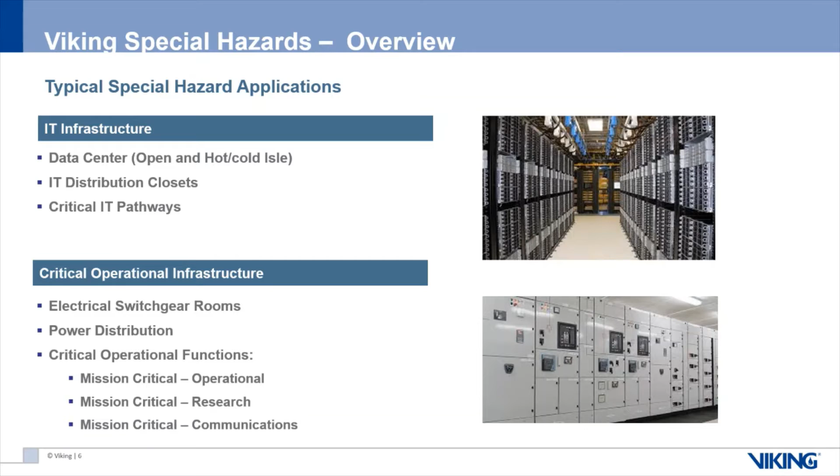So that's where the clean agents and some of the inert systems come into play. We want to put the fire out if there is an emergency, and we want to do so and maintain operation without any downtime.

The other applications when we deal with clean agent systems in particular, we're talking about rare books or archive storage, computer rooms, museums, and art galleries. If you haven't seen the Novec 3M product, it's pretty cool.

I know they do a really nice demonstration of the product and how it works. It's actually stored as a liquid inside the tank, and it gets dispelled as a gas once it discharges. But they actually show this: the demonstrator will take a piece of tissue paper and draw on it, then pour a little bit of water on it, and of course the ink runs and the paper gets dissolved. Then he'll pour a little bit of the agent on there, and nothing happens to the ink. The paper is intact, and it's just a little cold to the touch.

So that's very important when you're dealing with art galleries and museums. You don't want to destroy the rare properties or the rare materials that are inside the facility. So that's where clean agent comes into play.

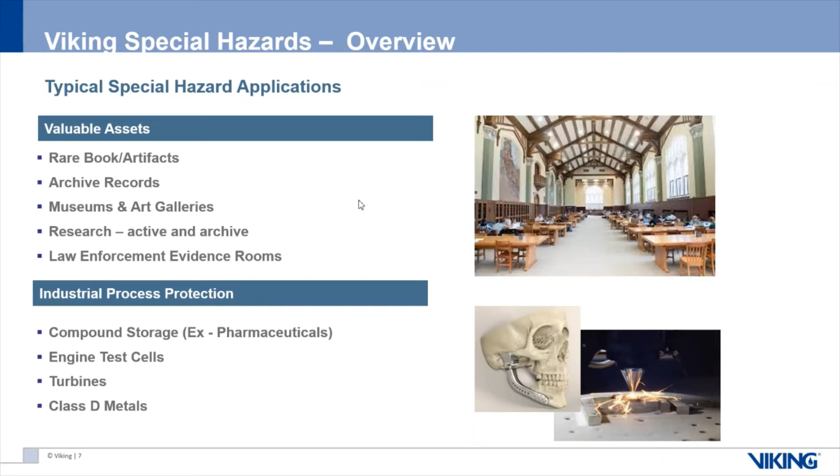We also, some of the inert systems, I talked about Class D metal fires, engine test cells, turbines. That's where some of the inert suppression systems come into play.

So I want to get into how the inert systems work. When we talk about inert clean agent systems, basically what we do is affect the oxygen level inside of the protected space or inside of the protected equipment. So we effectively reduce that oxygen level from 21% to something less than 16%. By interacting with that oxygen level, we're able to suppress the fire, and that's what puts it out.

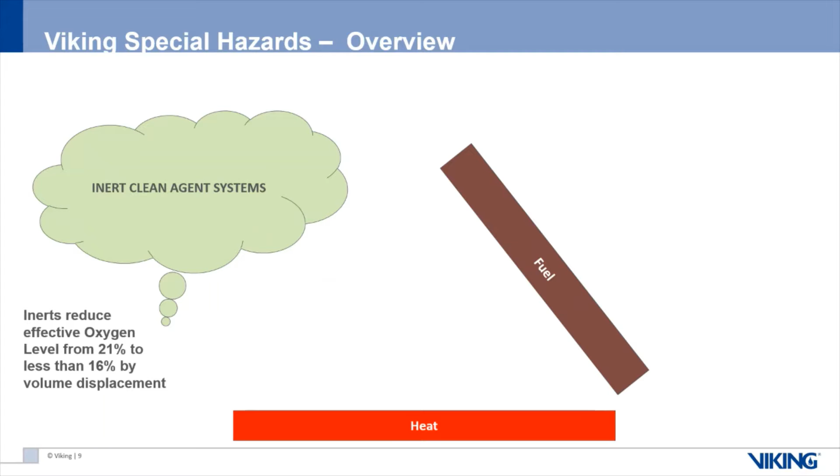Of course, the fire triangle is heat, fuel, and oxygen. In this case, when we talk about inert clean agent systems, we're affecting or interacting with the oxygen in the protected space that we're doing.

Some of those inert solutions include nitrogen, CO2, and argon. There are also some blended inert solutions. IG55, for example, is 50% argon, 50% nitrogen, also referred to as argonite. IG541 is 40% argon, 52% nitrogen, 8% CO2, also referred to as Inergen.

We sell the argon system as part of our solution to Class D metal fires, and as you'll see, it's the best agent, our best inert gas, I should say, for suppressing those types of fires.

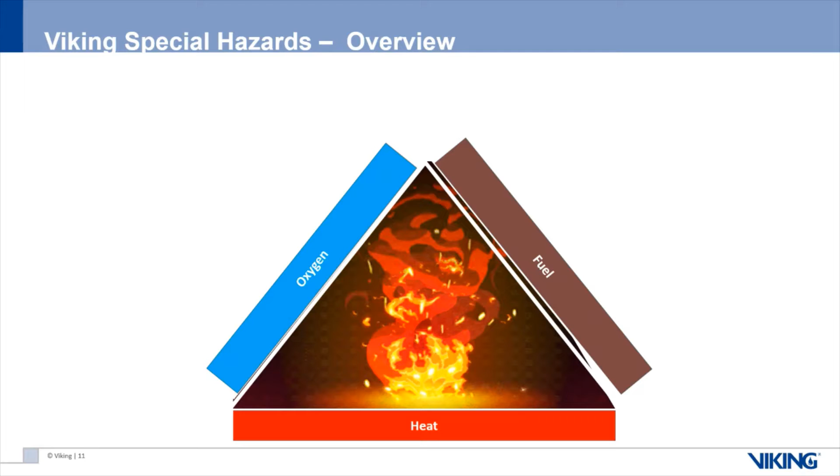So here we have our fire triangle again. If you have heat, fuel, and oxygen, of course you have fire. The synthetic clean agents, now I'm talking about the VSH 1230 or the Novec 1230 systems, or the VSH 200, FM 200 systems, those types of agents, when they're discharged, interact with the heat source of the fire triangle. They have a cooling effect, and that's how they put out the fire.

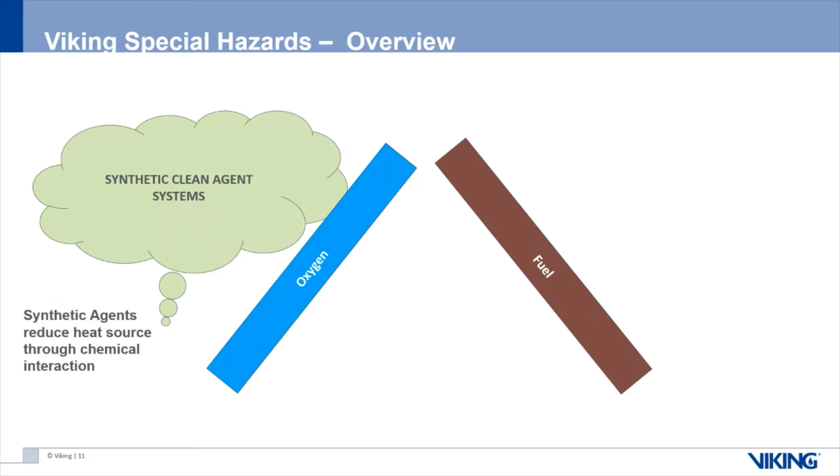So that's the difference between the two. The inert gas interacts with the oxygen, depletes the oxygen level of the space or the protected piece of equipment. The synthetic clean agent systems interact with the heat and have a cooling effect, and that's how we suppress the fire.

So when we're talking about clean agents and protecting the space, NFPA 2001 classifies the hazards. Class A, for example, deals with ordinary combustible materials such as wood, cloth, paper, rubber, and plastics. Class B is flammable liquids, and Class C is a fire that involves energized electrical equipment.

So when we're designing a data center or computer room, we're typically designing around a Class C fire, which is energized electrical equipment. For Novec, for example, our design concentration for a Class C fire would be 4.5% design concentration. That's the level we need to maintain inside that protected area in order to suppress the fire.

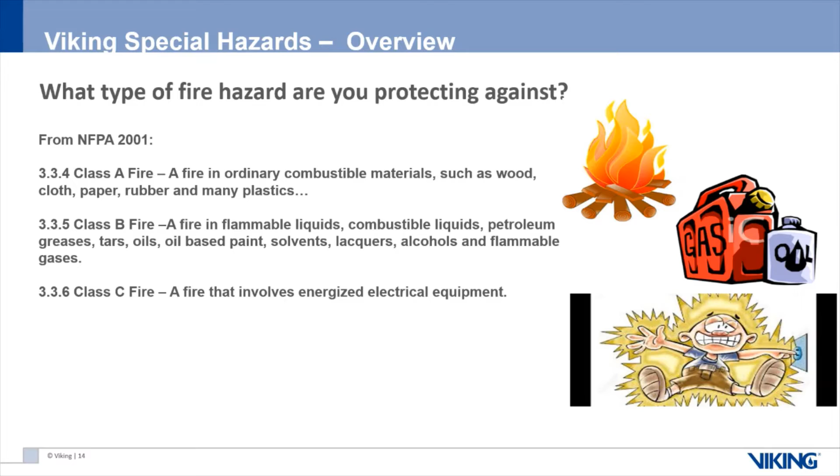For FM200 on a Class C energized fire, we're dealing with 7.3% design concentration. So when we set up a system, when we quote a system, we're doing our calculations based on those design concentrations when it comes to clean agent.

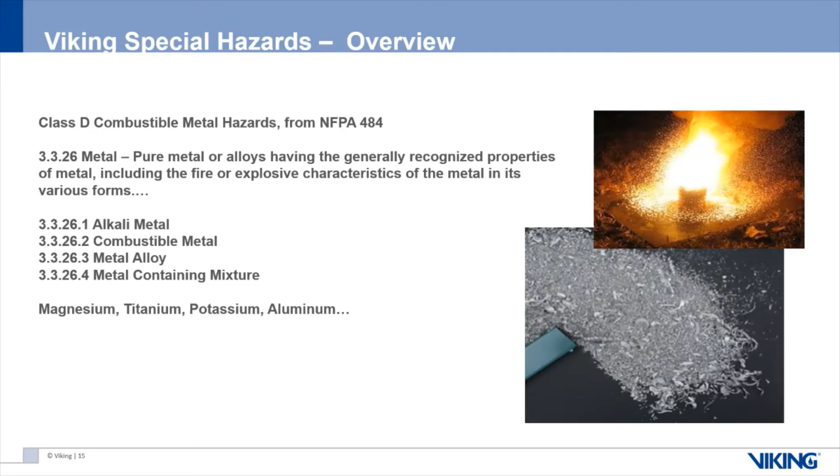Class D combustible metals is defined in NFPA 484 as pure metal or alloys having the generally recognized properties of metal, including those fire or explosive characteristics of the metal in its various forms. So here you see the different types: the alkali metals, the combustible metals, metal alloys, magnesium, titanium, potassium, and aluminum.

You do not want to put water on most Class D fires. You will have something not good happen in that case.

So we do sell a lot of argon systems. We're in the process of getting these systems approved. However, since it is the best solution for these types of combustible metal fires, we have not had any obstruction or any authority having jurisdiction not allowing us to install these argon systems in their facilities.

So when we're talking about our engineered suppression systems, here I'm talking about our clean agent systems, our VSH 1230, VSH 200. One of the advantages that Viking brings to the table is they're available in 360 PSI and 725 PSI cylinders, both for FM 200 and 3M Novec 1230.

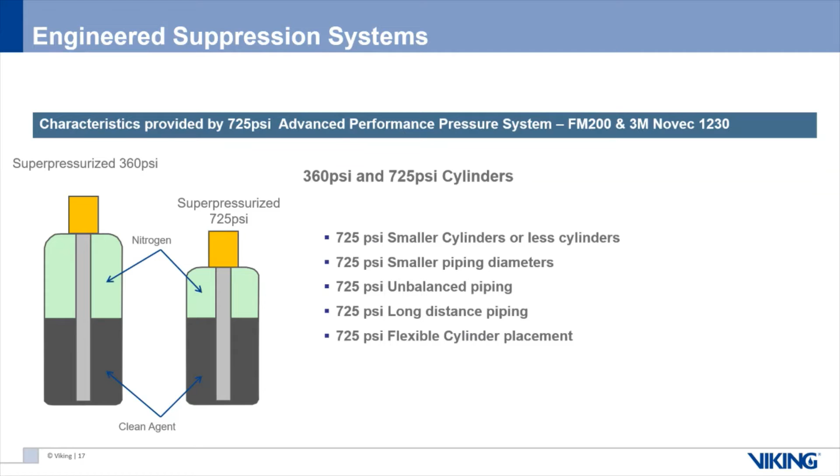So if you're interested in information on that, if you're looking to take over an existing halon system, get with Scott or get with myself, and we'll provide you some documentation that discusses that specific application and how we work with the 725 PSI cylinders.

So our typical pressure loss at our nozzle is 111 PSI, and the pressure loss at the cylinder valve is about 116 PSI. So do the math, and what you have left over to push that agent through the piping network and the tees and the fittings and whatnot. On a standard pressurized 360 PSI system, you're looking at 133 PSI versus close to 500 PSI on a high pressure 725 PSI system.

So again, that enables us to use smaller cylinders, run the piping network further, use smaller piping. And if we're replacing an existing halon system, in most cases, almost all cases, we're able to utilize the existing piping network without having to replace all that.

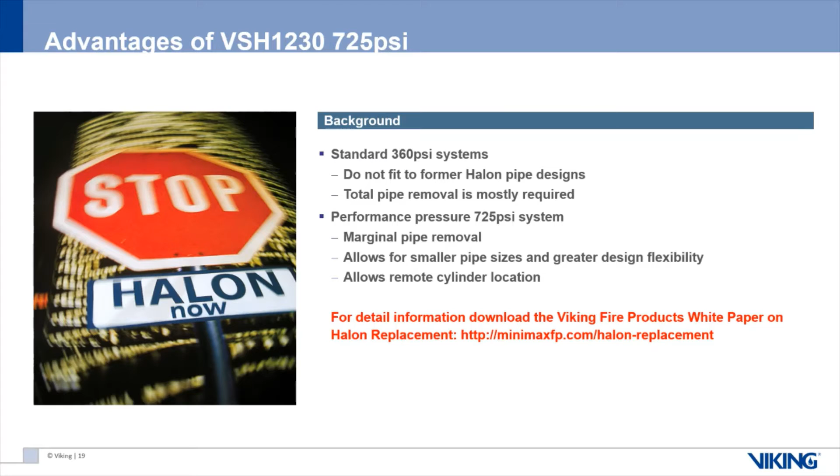So some of the advantages I just reviewed: minimal piping removal, allows for smaller pipe sizing, greater flexibility. I'm kind of repeating myself here, but it's a nice thing that we like to brag about that we have. And here is the actual link that I was talking about. We published a white paper on halon replacement and replacing it with 725 PSI systems, or super-pressurized systems. So that is available to you.

Some other advantages of our 1230 VSH 1230 725 PSI system: we're able to do multi-zone as an option. This could replace multiple single zone systems with fewer containers, less space and cost. We'd have to run the calcs and see if that's more of an economical solution for you, but at the higher pressure systems, we do have that capability.

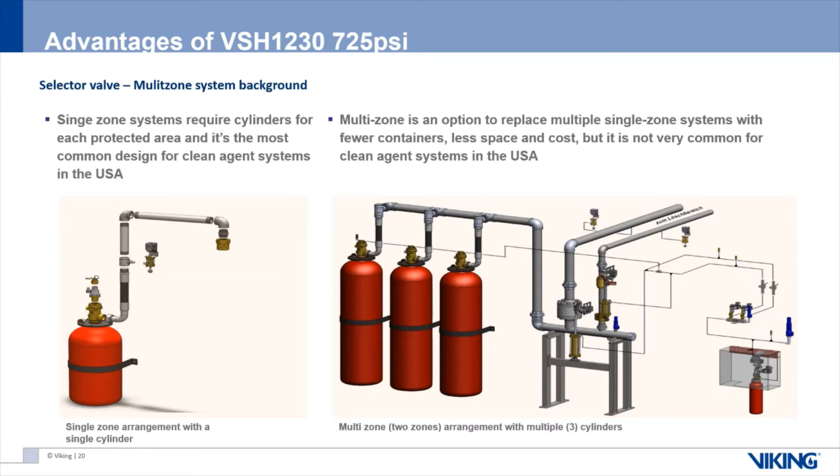Now, when we're dealing—I mentioned the design concentrations earlier for the clean agent systems—when we're talking about the inert gas, we're actually designing it at 80% design concentration per NFPA requirements, and we're having a hold time of 20 minutes.

I did mention that the UL listing is pending. Hopefully we'll have that shortly, but however, since it's a perfect solution for your Class D metal fires, we have not had a system not be approved for use.

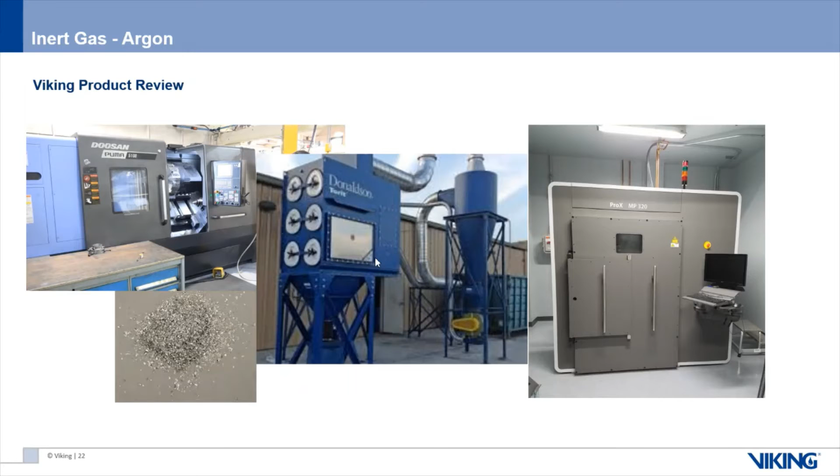I'll see if I can run it through here.

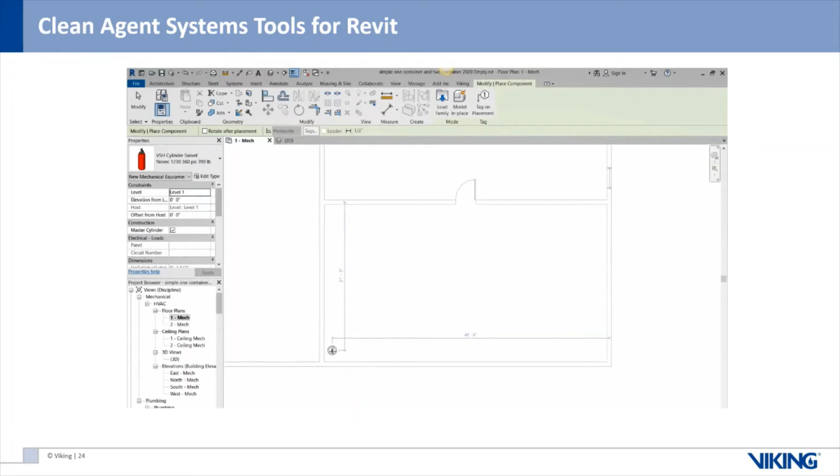So what you're able to do by going to our clean agent assistant option, you click on it, start a project, select a room size, and you're able to run your calculations based on the dimensions of that room. You're able to draw out the piping network, place the containers. Basically, you're able to do a full design of the system utilizing this Viking Tools for Revit. It's populated with all of our families, tanks, panels, you name it, when it comes to the design of a clean agent system.

So this tool is available free of charge to you on our website. If you're using Revit, it's fantastic, it's great. If you're not using Revit, I'll just let this thing run through.

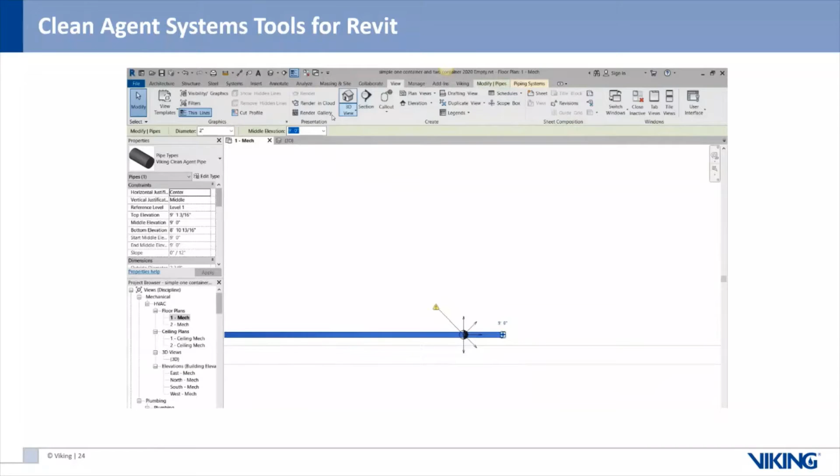We do have our Design Manager program. Typically in the past, what we've done is we want to make sure our customers know these systems, so we do in-house training, which is still available to you. With the pandemic, we're kind of limited since people don't want to get together in large groups, so we're limited on when we run those classes. But that's one way of doing it, come to our clean agent class up in Caledonia, Michigan.

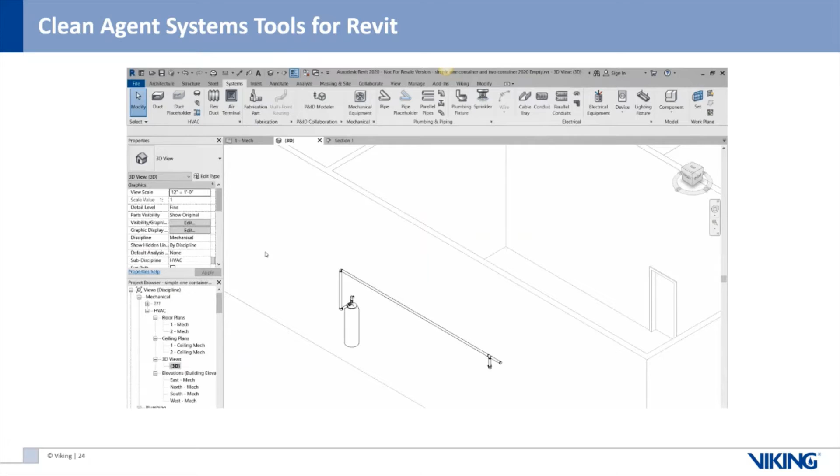Another way of doing it is we brought it online. So if you're interested in our self-paced online clean agent system course, let Scott know, I'll send you the link and we'll get you signed up. It's a self-paced course. Once you complete the course, you have access to our Design Manager software.

This is still showing the Revit portion of it, and this will print out a whole calculation submittal package for you in this form. Here's the calculations, and you also have the pipe layout, the pipes and fittings you need. It's shown in 3D, and again, there's the download for that.

But by attending our class, whether you do it online or in Caledonia, Michigan, you have access to our Viking Design Manager software, which basically does the same thing, only it's not in Revit. So if you don't have Revit, this is the way you want to go.

And this will do your quantity calculations, your layout, your piping. You have to enter your nodes and which direction you want to go. It'll lay out a full system, but our Clean Agent course will take you through what you need to know to run this software.

So this one, after you take the class, either online or in person, you have a 30-day free trial of the Viking Design Manager software. After that 30 days, you can buy the software on a yearly basis, and I want to say it's about $600 US, but don't quote me on that.

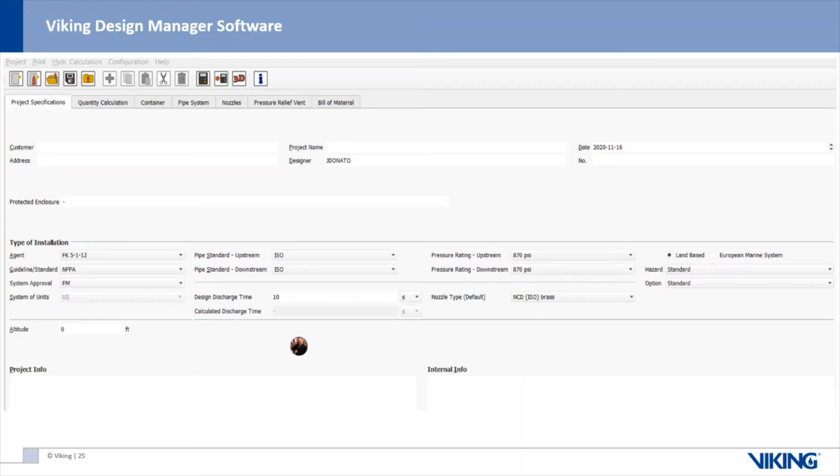So those are your two options. If you have Revit, the free Viking Tools for Revit is the way to go. Still recommend you take the class, either online or in person. Or you can get access to the Design Manager software after you take our class.

Okay, detection and control. Here's some of the products that we have. I showed you the 1U, the self-contained, self-extinguishing system. We also sell the Xtralis VESDA air sampling systems. Protectowire is available. We have the Univario detection, and of course panels listed up in Canada, some Potter panels and the Notifier NFS 320, the Viking VFR-400. So we have both conventional and addressable panels available to you, and of course all the peripheral appliances that go with that. This is the Univario.

It's available in flame detection, triple IR, or UV, ultraviolet detection. And as I mentioned at the beginning, we use the same base whether we're talking about a UV IR detector or heat detectors. What I really like about this unit is it uses the same base, so we're able to swap out detectors. It's configurable based on your mounting height, or mounting application. You have to buy a relay card for it if you want to interface with something, which you typically do.

But these industrial heat detectors, I don't know if you see this here, will go up to 850 degrees Celsius. I hope I did the math right on that. Up in Canada, you can correct me, but you can see it goes up to a very high temperature, 1560 degrees Fahrenheit. That's a fixed temperature heat detector, and you can get it in different applications with a standard rod, extended rod, or a flexible tubing rod.

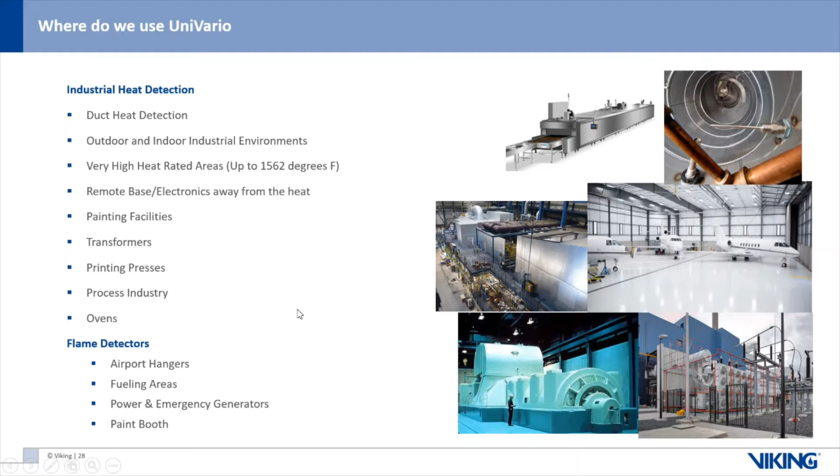Here are some applications: duct heat detection, outdoor and indoor environments, industrial environments, painting facilities, ovens. Here you see one installed in ductwork in the upper right-hand corner. Our flame detectors are used a lot in foam systems, airport hangars, fueling areas, power emergency generators, and paint booths. So the Univario is a pretty slick detector.

This is our IBC containment. I know I'm rushing, but there's a lot to cover here and I'm kind of limited on time—only got a few minutes left.

This is our IBC containment unit that's available. Really any of your customers, end users, or clients that store flammable liquids store them in these intermediate bulk storage containers. And typically, if they don't have this containment system, they have these out on the floor of their warehouse or wherever. So if these things get punctured and leak, you have flammable liquids spilling all over the place. Or if, God forbid, there's a fire, you have a bigger emergency than that.

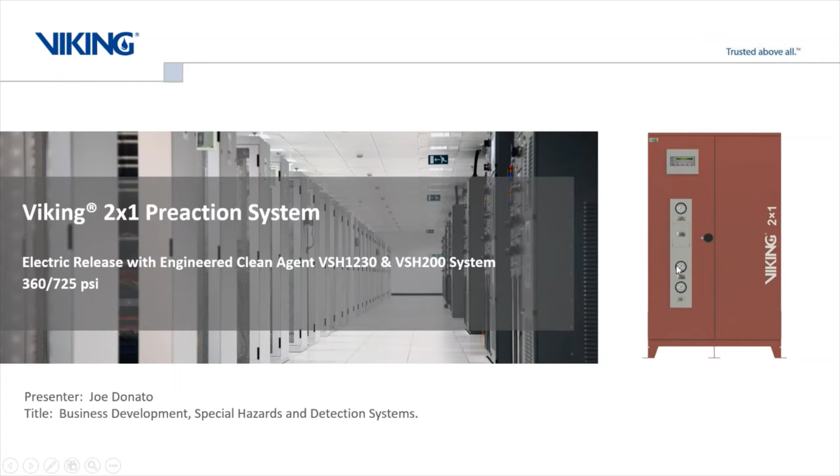Last but not least, our Viking 2x1. I mentioned this is made in conjunction with our friends at Fireflex in Canada. So if you want, inside a cabinet, a combination engineered system that contains both clean agent—either Novec 1230 or FM-200 at either 360 or 725 PSI—and it also houses a single interlock or double interlock pre-action system. You can get that in the same container. The detection for that unit is shared by both the pre-action system and the clean agent system.

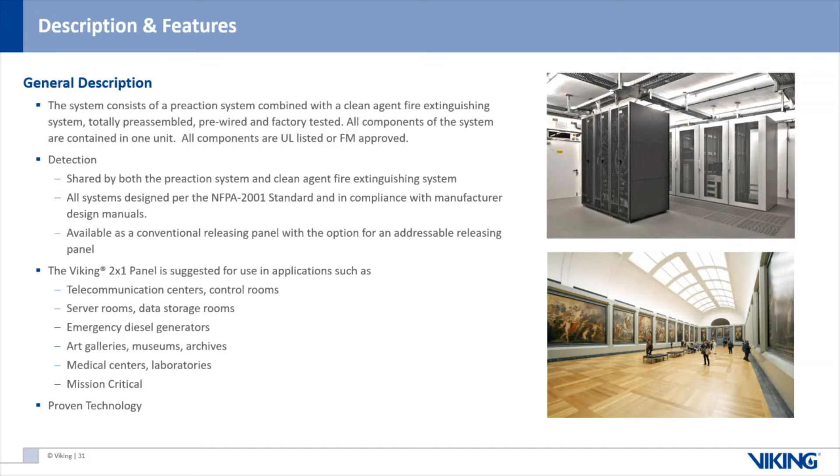This system actually comes in a conventional configuration. If you are a Notifier distributor, you will have access to the programming key where you can make it addressable, but we can make this an addressable system if need be, depending on your application. But if you're looking for a self-contained system—pre-action, clean agent in a canister—there it is.

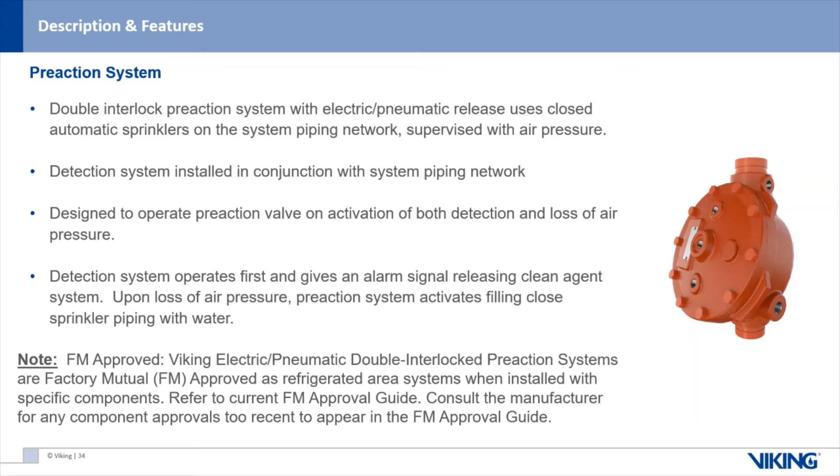There's just more information on our valve, our deluge valve. Of course, the clean agent is the same thing I talked about, only it's inside of a cabinet, utilizing either the Novec 1230 or the FM-200, and you can get it in either our standard pressurized system or our super pressurized system.

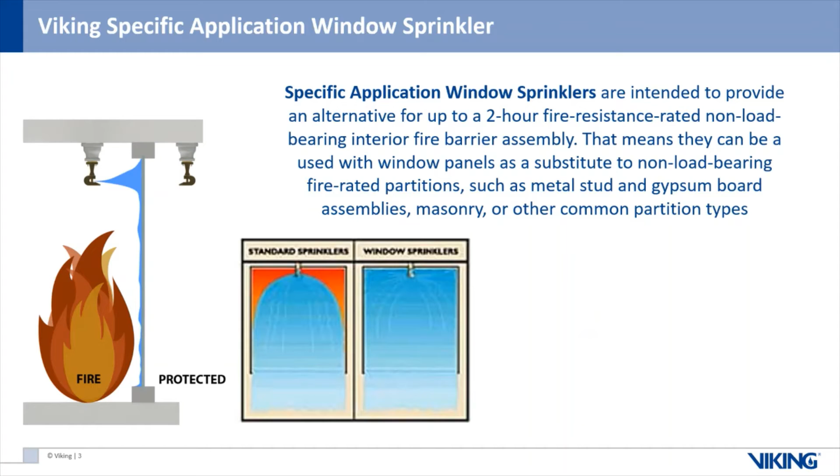Normally when we talk about fire protection and fire sprinklers, we're talking about suppressing or controlling fires. In this case, these are actually getting put into the IBC and other building codes where you're talking about equivalency of rated walls. So it's much different than controlling fires—these are very specific for protecting glazing in walls.

I have a video here that I hope plays. It looks like it is, at least on my screen here. This shows you a short video of the window sprinklers operating.

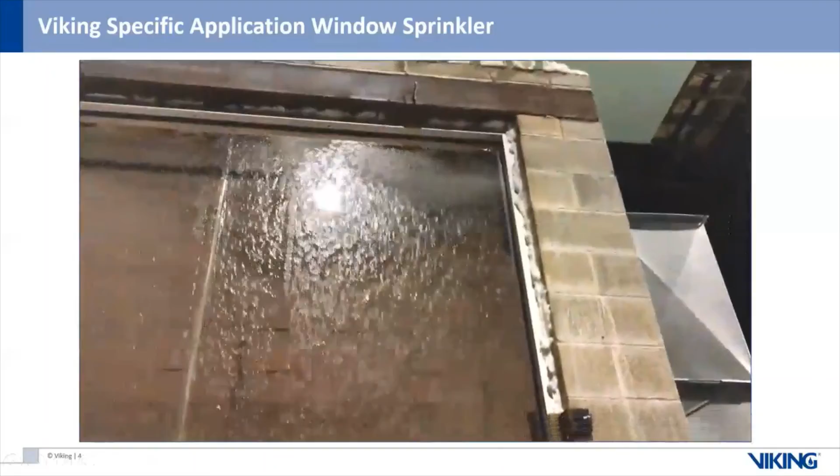This is in a test furnace, and you can see that we're covering—the key to these window sprinklers and why they're unique is that they cover the glass corner to corner. There are no dry spots, and that's part of the listing. You have to meet the equivalency to this 2-hour rating, and part of that is complete wetting of the glazing of the window surface. So these sprinklers and deflectors are specifically designed to go corner to corner with water on the glazing.

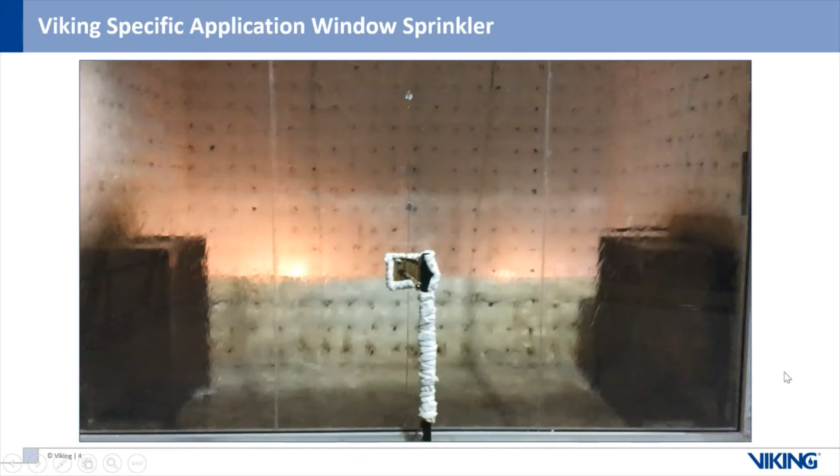The most common questions, besides when these come up in projects—they're usually pushed down through the architects and engineering community as a design element in a project—the question always comes up: where can I actually apply these types of window sprinklers? There are limitations, so I'm going to go through some of the glass requirements for these window sprinklers.

So the glazing is fairly simple: it must be at least 1/4 inch thick, and it has to be heat-strengthened or tempered glass, which most is, so that's typically not an issue. We are limited on height—13 feet max—although there's no width restriction as long as panes are separated by vertical mullions or butt joints. So there's no limitation on the length of that wall.

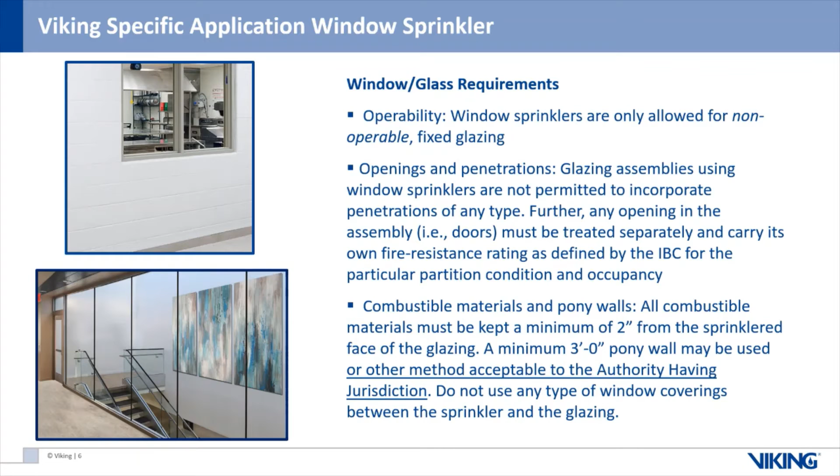Another thing that comes up with glazing came up last week, a couple questions from an engineer about a curved glass situation. That's not an application for window sprinklers. It can't be curved or sloped. It has to be vertical and flat for window sprinklers, because it all really goes back to the corner to corner coverage of the water.

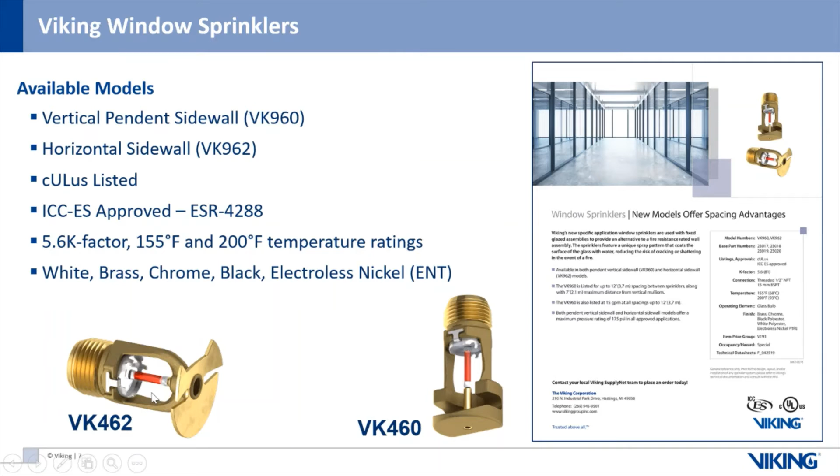That's the application for these sprinklers. Viking has two models: a vertical pendent sidewall type, the VK 460, and a horizontal sidewall, the VK 462. There are some listing differences. The VK 460 can be spaced further than the 462. The pendant vertical sidewall can be spaced up to 12 feet apart, while the horizontal sidewall model has a max spacing of 8 feet, so that's a big difference.

The other big difference is when you space the pendant vertical sidewall at any spacing up to 12 feet, it's only 15 GPM. When you space the horizontal sidewall, there are two flows depending on how far apart you space them. So there is a difference. Most of the application, I'd say 75 to 80%, is for the pendant vertical sidewall model, as opposed to the horizontal sidewall model.

The next technology I'm going to talk about is institutional sprinklers, also specialty sprinklers. It's not a type manufacturers update very often, almost a once-in-a-generation type change, and we did just launch these. NFPA defines institutional sprinklers as designed for resistance to load bearing and designed so the components can't be converted into weapons. We have to take that direction and figure out how to make a device that meets that requirement.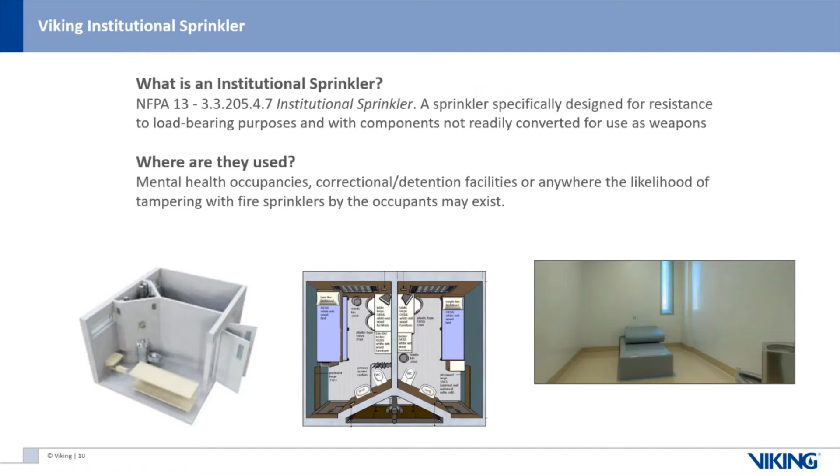Obviously the first thing you think of with institutional sprinklers are prisons or jails, which is a big market, but they're also used in mental health facilities, some schools, and places with holding cells. It doesn't have to be a whole facility using these sprinklers; it can just be part of a facility or even a few rooms within a facility.

We go back to the NFPA definition of what these are. A misconception is that these sprinklers are tamper-proof because they're in these types of facilities, and apparently when you're incarcerated you have a lot of time to think about what you could do or damage in the space you're in. But they're not really designed to be tamper-proof at all. They're actually designed to incorporate tamper-resistant and breakaway features, since they can't bear a heavy load and can't be easily taken apart to create weapons.

So in reality, these sprinklers are designed to operate if they're tampered with. If somebody tries to get a metal piece out of it to make a weapon, we want the sprinkler to operate. If somebody is going to try to hang themselves from the device, we want it to operate. That's what we build into this particular sprinkler, and they're very special.

They're very sophisticated devices. So what we introduced are our brand new line of institutional sprinklers. We have both a pendant version and a sidewall version, in both standard coverage and extended coverage versions of both. They're all 5.6K, and the extended coverage version can be used up to 16 by 16.

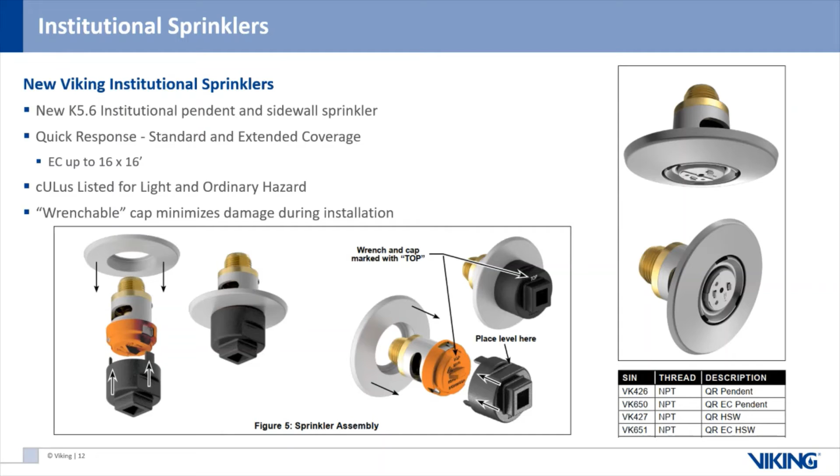The other thing we incorporated is on the outside of the sprinkler, on the link itself, we put the SIN number and also the type of sprinkler - the orientation, whether it's a horizontal sidewall or a pendant sprinkler. Why is that important? Because the pendants and sidewalls look identical. Without the markings on the outside, there would be no way to determine which sprinkler was which, or if they were installed in the correct position. So a sprinkler contractor or installer can visually confirm they installed it correctly. And from an inspection perspective, it's also easily identified as a sidewall or a pendant, and that's really key.

So a couple nice features there with our institutional sprinklers.

Next topic, another specific application: attic sprinklers. Attic sprinklers have been around for over 20 years now, and there was a patent on attic technology that lasted a very long time. But within the last 4 to 5 years, that patent expired, and now there is significant competition in this specific attic sprinkler application space. We just launched in the last couple months a new attic sprinkler.

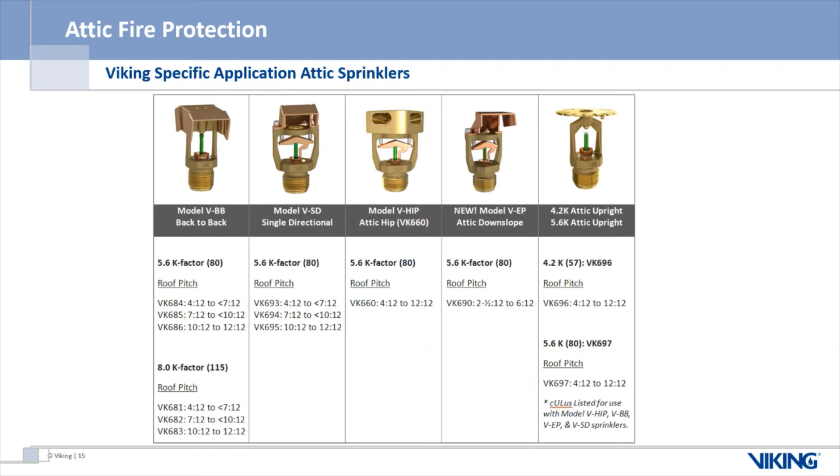They're all specific applications, meaning you get those advantages if you're utilizing them in a wet-type system. If it's antifreeze, you could utilize CPVC to feed these sprinklers. If you're using specific application attic sprinklers, you can also utilize CPVC to feed the sprinklers on the floor below. So if you have pendants feeding the top floor of an apartment building, and you're protecting that combustible attic space with attic sprinklers, you can also use CPVC to protect the floor below. If you were to use standard spray uprights and design per NFPA 13, you'd have to use steel pipe to protect that floor below.

Some nice advantages to being able to go to the specific application attic sprinklers. And this goes back to the fact that because they are specific application, you're not going to find design criteria for these sprinklers in NFPA 13. Where you'll find the information on how to design and apply these particular sprinklers is in the manufacturer's data sheets, and that's what makes them specific application. They are tested, UL listed sprinklers, but all the information on how to apply them exists in the manufacturer's technical data sheet. The first ones we'll talk about, which I think are the most common ones people recognize as specific application attic sprinklers, are our back-to-back sprinklers and our single directional sprinklers.

These sprinklers are typically used, almost always, at the ridge or peak of the main attic, the high point in a sloped attic condition. A back-to-back does exactly what it says: you run it along the peak or ridge, and it throws water in both directions down towards the eaves. In a perfect world scenario, you could protect an attic with a single line of back-to-back sprinklers up to a 60-foot span attic.

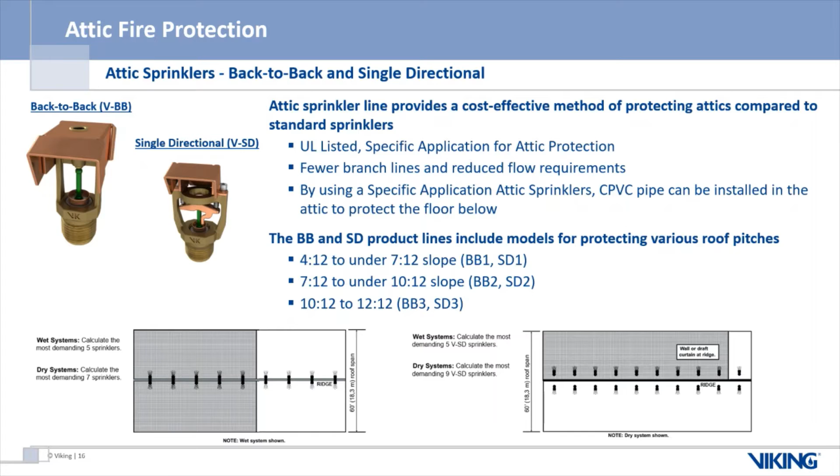Single directional is the same kind of thing. If you had a ridge with some type of obstruction or blocking, you'd have sprinklers that just throw in one direction down towards the eave. These are listed from anywhere from a 4:12 slope all the way up to a very steep 12:12 slope, and there are different models for the three categories of slope: 4:12 to 7:12, 7 to 10, and then up to 12.

So the next sprinkler I'm going to talk about is what I call our utility attic sprinkler, our attic upright. There are multiple uses for this sprinkler, but I'm going to talk about a few of them. The two previous most common ways to use the sprinkler were to utilize it with back-to-backs and single directional sprinklers to increase the span that you're able to throw.

I mentioned that a back-to-back sprinkler can cover a span of a sloped attic up to 60 feet with one row of back-to-backs potentially. So if you added some attic upright sprinklers at the eaves, aligned at each eave, now you can cover a span all the way up to 80 feet. These attic uprights, a line of them at the eaves or near the eaves, would give you an additional 10-foot span. So now you're looking at 3 lines of specific application attic sprinklers that could be used to cover up to an 80-foot span utilizing back-to-backs.

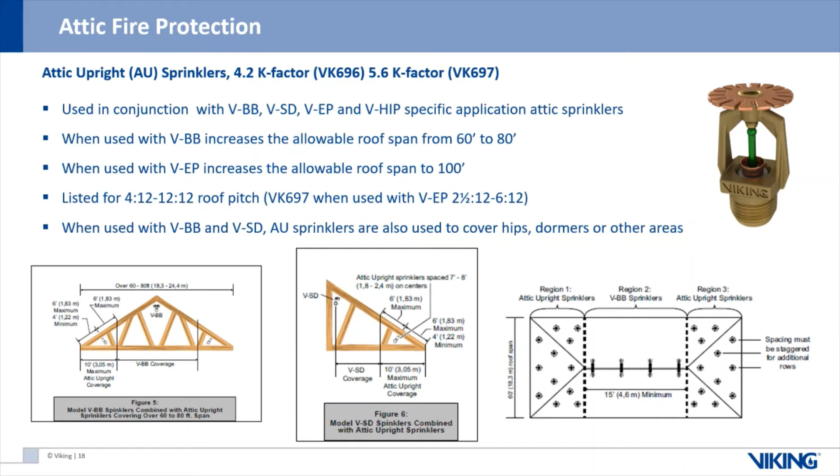In that detail on the right, you'll see that the area in the center is utilizing a line of back-to-backs to cover the main ridge or main peak of that attic, and then we have the attic upright sprinklers staggered throughout the two hip areas. That's a great application and a very common application of the attic upright sprinkler.

So speaking of hips, there is a specific application attic sprinkler just for hip areas: our attic hip sprinkler, the VK660. Where you would use this is along the hip ridge.

So the main ridge is that peak or the high ridge that runs through the attic, right? And that's where you'd typically be utilizing your back-to-backs or your single directional sprinklers. The hip ridge is that ridge that slopes down towards the corner of the building, okay? And these throw in multi-directions, so they throw in 2 directions in a 90-degree angle down the hip.

But you need to have the right framing to do that, so you're not actually creating an obstruction of the spray pattern of the hip sprinkler. If you have that, these are great sprinklers to use and they can cover a hip effectively. If you have a different construction method where you'd be obstructing the spray pattern by using the hip sprinklers, that's where you'd go to what we talked about on the last slide, using the attic upright sprinklers in those hip areas. So there's a couple ways to deal with hips in these combustible attic spaces.

So the next sprinkler is our new EP attic sprinkler. You use these in conjunction with attic uprights, but think about it this way: we talked about the back-to-backs and the single directionals used at the ridge or peak of the attic. What this sprinkler does is kind of reverse that. With the back-to-backs, you'd use the uprights at the eaves as additional lines to make a bigger span. Here, you're actually taking the uprights and putting them at the ridge, typically where the back-to-backs would be, as the other way of protecting attics with specific application sprinklers.

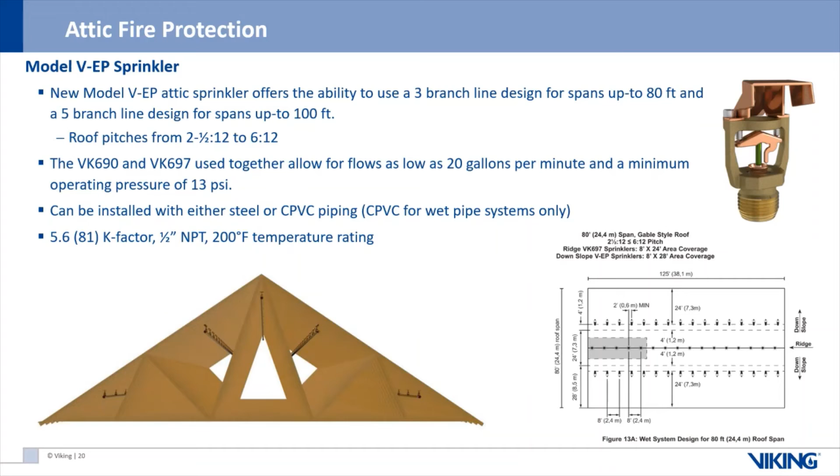So a couple of really nice additions to being able to protect attics, so people don't have to go back to NFPA 13 with standard spray uprights. That was another solution for potentially protecting attics. So I'm going to get into now combustible concealed space sprinklers.

Similar to attic sprinklers, these have been around for quite a while. When we're talking about combustible concealed spaces, we're talking about a couple of main categories: the spaces in between floors, which are generally wood frame type construction.

We're not talking about NFPA 13D or NFPA 13R, we're talking about Full NFPA 13 type construction, that's where we use these. Just like with attic sprinklers, that's typically when we get into protecting attics, in these NFPA 13 applications. So the two main areas are between the floors, and flat attic spaces or slightly sloped attics or roofs.

So two areas where we can use combustible concealed space sprinklers. I'm going to talk specifically about the most commonly used sprinkler, where Viking has a really nice advantage over the competition, which is our VK950, our 5.6K coin sprinkler. We call them our coin sprinklers. These are for combustible concealed spaces, interstitial spaces, and these are the latest in the technology.

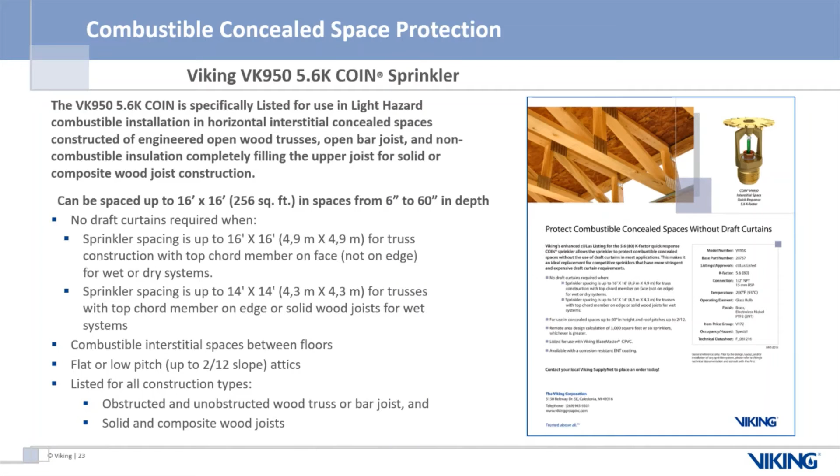So this is a pretty big deal, a big change for anybody that's used these sprinklers over the years. I'm going to go over the specifics — you've got to really dig into the data sheet a little bit, but there are some specifics on how you can utilize the sprinkler without draft curtains, and it really has to do mostly with construction type.

Here are the two main details. Like I said, there's more language in our data sheets, that's where you go to learn all the specifics about using these sprinklers. But no draft curtains are required when the truss — this is wood, open web wood truss construction, or solid wood joist — you can space the coin at 14 by 14.

If the wood truss is on edge, if the top chord of that truss is on edge, that 2x4 is turned vertically — that's what we call on edge — the maximum spacing is 14 by 14. If that top chord is on its face, in a more traditional looking open web joist, you can go all the way to the maximum spacing of 16 by 16.

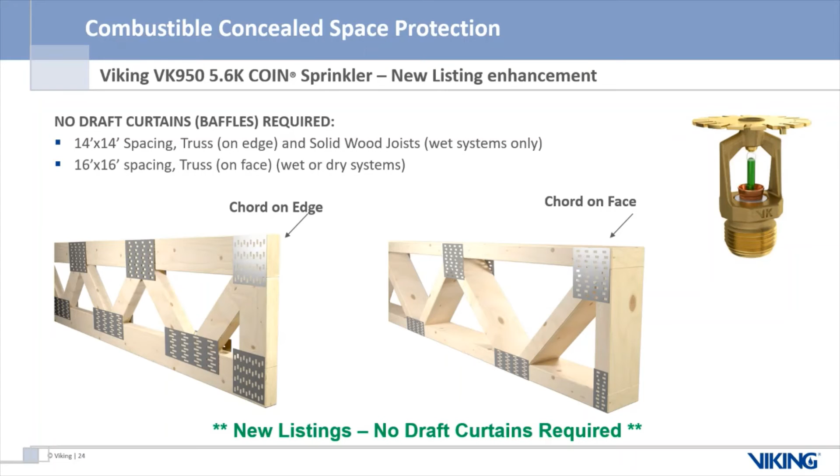So those are generally the two requirements you'd look for to use these without draft curtains, for two very common construction types: chord on edge with open web construction gets a 14-foot spacing, chord on its face you can go all the way up to 16-foot spacing. No draft curtains required.

Talk a little bit about residential sprinklers. I picked two categories to go over, and they're both concealed sprinklers, because this is really where everything's heading in the residential world. I've been around this industry a while, and I've seen a shift from semi-recessed style frame sprinklers to concealed sprinklers. It first happened with pendant style sprinklers, concealed pendants, and now it's happening with concealed sidewalls. This trend is happening very quick, where people in the residential world are really into aesthetics and want these sprinklers to disappear into the ceiling, or the walls in the case of sidewalls. That's where we get this demand for concealed sprinklers, and I'm going to touch upon a few key things here.

We are the only manufacturer that has two different K factors for concealed sidewalls. There are some other residential concealed sidewalls in the market, but most manufacturers of those are limited to one K factor. We actually have two, and we have the biggest coverage areas.

The VK480, our smaller K factor, is a 4.0 K factor, initially targeted for NFPA 13D and 13R with their 0.05 densities. We do see it used a lot in some mid and high rises too, but we also have a sprinkler specifically designed for the 0.1 density applications of NFPA 13 residential, and that's the VK490. That really targets multifamily, mid and high rise residential, and hospitality segments with hotels, potentially high rise dorms, those types of applications.

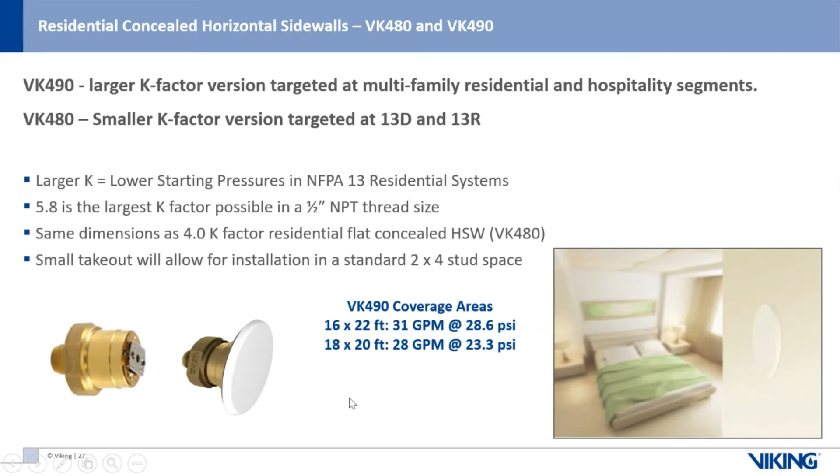All glass bulb — that was a big refresh for us. We started this brand new platform a few years ago with the VK94, 494, and we've rolled that out now to the VK496 and 498, which are all glass bulb style concealed pendant sprinklers.

One thing I'll mention is that we really focused, when we developed these new models, on the intermediate temperature versions, because what happened a couple cycles ago with NFPA is they changed the allowance for intermediate temperature sprinklers. It used to be, pre-2013 in NFPA 13, 13D and 13R, you could only use intermediate temperature sprinklers where you expected these higher heat areas.

So, you know, if you needed to be in a room with a laundry room, or near a heat source because there was no other way to put it, or in a skylight, let's say — there were a number of places where NFPA said if you need to be near a heat source, you can use an intermediate temperature sprinkler, but the rest of the application required ordinary temperature sprinklers. They changed that, and now you can use ordinary or intermediate temperature sprinklers throughout the occupancy. That's a big change.

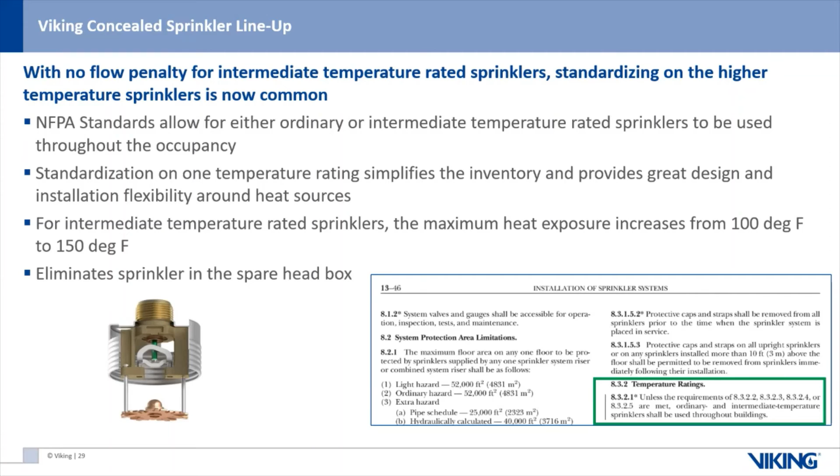The other nice advantage is this proximity to heat sources. You can be a lot closer to potential heat sources in a residential occupancy when you utilize intermediate temperature sprinklers, giving you a lot more flexibility in design. It might give you flexibility if something changed on a job site - they designed in a stove somewhere, but you get on site and that kitchen is rearranged, so now you're too close if you were using an ordinary temperature sprinkler. Lots of flexibility when you go to intermediate temp.

So that covers just a few highlights of the residential sprinklers that Viking has to offer.

Now I'm going to talk a little bit about CPVC and specifically our newest technology. Viking is a full line manufacturer of BlazeMaster CPVC. We make our own pipe in a dedicated CPVC pipe manufacturing facility in Huntsville, Alabama, and we make BlazeMaster CPVC fittings in another dedicated plant in Charlestown, Indiana. So we have two CPVC facilities, and we make our complete line of BlazeMaster CPVC.

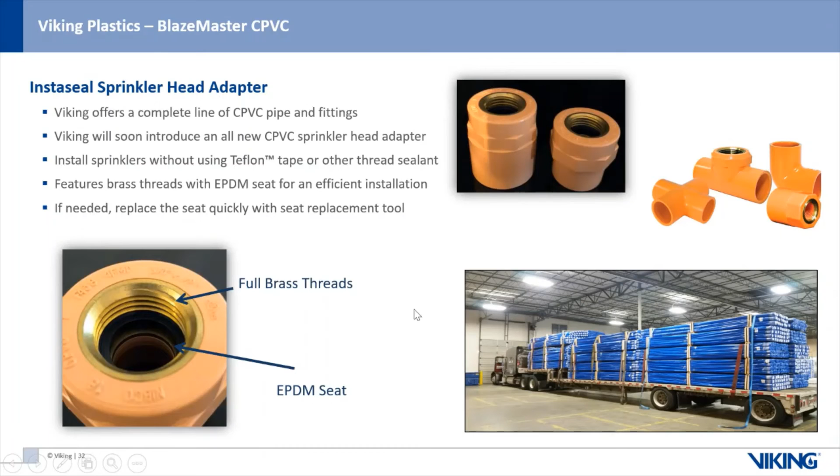We launched these earlier this year, and we've had a lot of success so far with people utilizing the InstaSeal sprinkler head adapters. So that's really all I wanted to talk about as far as CPVC, just to let everybody know that we are a full line manufacturer of BlazeMaster. Viking Plastics has been in it for quite a while.

So the next and last thing I'm going to talk about is a new product that came out probably about a month or two ago. We launched this and developed it in conjunction with our partner with CPVC. Lubrizol, our resin vendor for our CPVC, also worked on the development of this FreezeMaster antifreeze.

This antifreeze segment is super interesting because there's been so many changes in the last 10 years or so. Antifreeze used to have significant use throughout fire protection up until about 2008, 9, 10. There were some issues with certain high concentration systems where they actually contributed to the spread of fire, and ultimately NFPA came to the decision that some of these systems were dangerous. There was a TIA that went through, I think in 2010, basically saying you no longer can use antifreeze in new fire sprinkler systems - it kind of banned the use of antifreeze.

What they have allowed is antifreeze to continue to be used in existing antifreeze systems, but that's now coming to an end. These two dates - one goes back now over 8 years, that's with new systems. NFPA said that if you're going to use antifreeze in a new system, it has to be a listed antifreeze. But up until about 1.5 years ago, there was no such thing as a listed antifreeze.

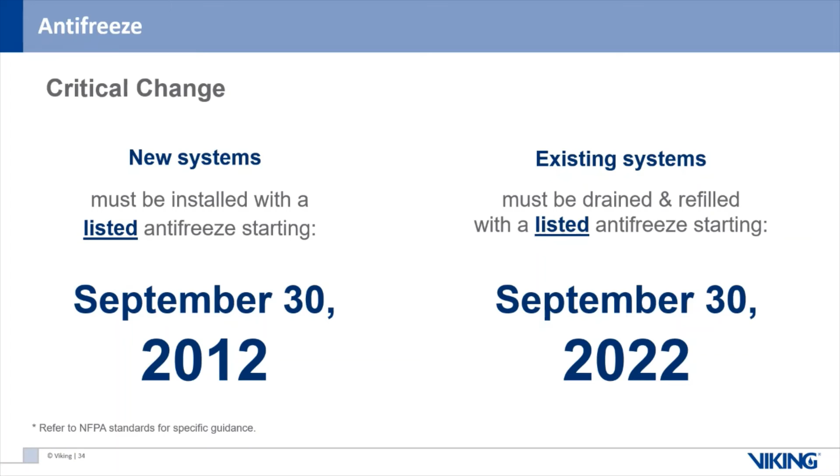Existing systems is another issue. We've got all these older systems that have non-listed or unlisted antifreeze in them, and that's coming to a close in a couple of years. As of right now, NFPA is saying that by September 30th, 2022, the existing antifreeze systems that have unlisted antifreeze in them need to be transitioned to a listed antifreeze by that date. So there's some discussions going on with NFPA. This is where it stands.

So now I'm going to talk a little bit about Freeze Master antifreeze. What we have is a listed antifreeze, and I'm going to talk about some of these temperatures here, because people always want to talk about the temperature. This minimum use temperature is where our UL listing is. The minimum use temperature is -12F, -24C, and that's where the listing is, okay?

There's a safety factor built in, because the freeze point doesn't really start until -15F, -26C, which is really where that solution starts to crystallize and you start to see some freezing. There's also these other temperatures as you get colder, where we talk about pour point and burst point. Those are there kind of just for your information only, to understand how this liquid works. But you can see that it has to be super cold, you know, -50C, before you're talking about this solution freezing solid and potentially bursting. So the key number here is -12 or -24C, which is that minimum use temperature, which is for the listing.

So when we launched this, NFPA also made some changes to the size limitations of the systems that you can use with antifreeze. Pre-launch of this product, about 8 weeks ago, NFPA 13D and 13R had unlimited size application for antifreeze. What they've done now is they've limited that to 500 gallons when you're talking about NFPA 13D and NFPA 13R. In 13R, we're talking about the dwelling units, the residential portions of those dwelling units. So we've limited it to 500 gallons, which I don't think is that big a deal. I mean, those are big antifreeze systems, right?

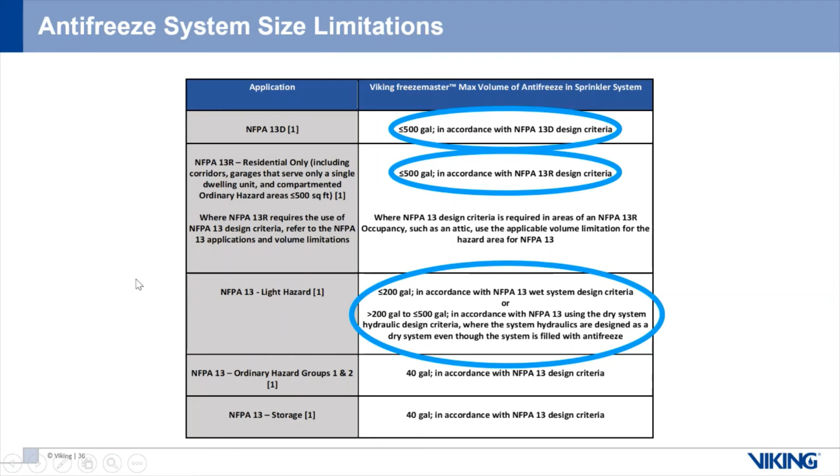So any type of piping material that you can think of, we are compatible with for fire sprinkler.

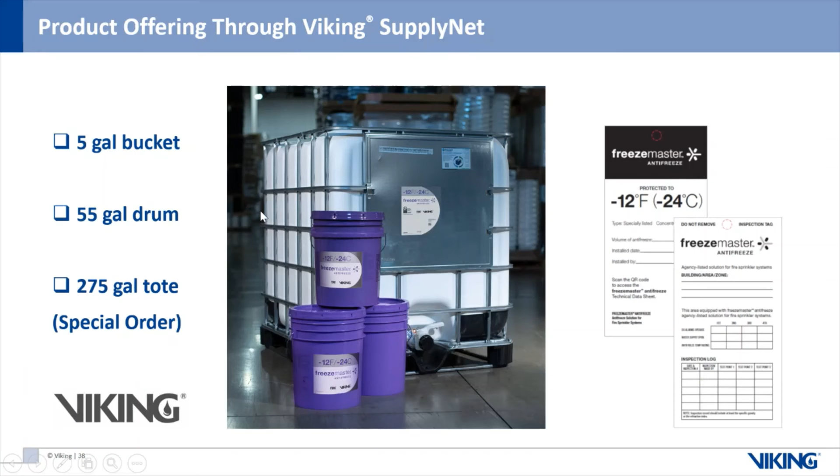The three sizes we have are 5-gallon pails or buckets, 55-gallon drums, and also special order 275-gallon totes. These are all available through your local branches throughout Canada.

Just to recap some of the benefits here: it's a factory pre-mixed antifreeze, fully UL listed, only available through us, and it has a minimum use temperature of -12 or -24 C, a little colder than the competition. You can use this antifreeze up to 500 gallons in NFPA light hazard, and it's compatible with all the materials.

One of the really nice things, because Lubrizol is a specialty chemical company, is they were able to include a corrosion inhibitor package that offers a nice benefit of controlling potential corrosion in these antifreeze systems. As I've traveled around North America for a number of years, you hear a lot of stories about areas where antifreeze was seen as a product with a corrosion issue problem. They were able to include this corrosion inhibitor, and it really cuts down on the amount of corrosion in the piping system when you use Freeze Master. That's a really nice benefit for those areas that deal with corrosion.

The last thing I'll mention is we did make the decision to dye the product purple, on purpose, so it's really easy to identify - it's not a clear liquid. This has really come out as one of the things that, as we're going out talking to the contractors utilizing this product, is coming really handy, because you can see when the system's fully flushed and filled, you know you have that purple liquid in there. So instead of having to test a clear liquid, you're able to really see visually that Freeze Master is installed.

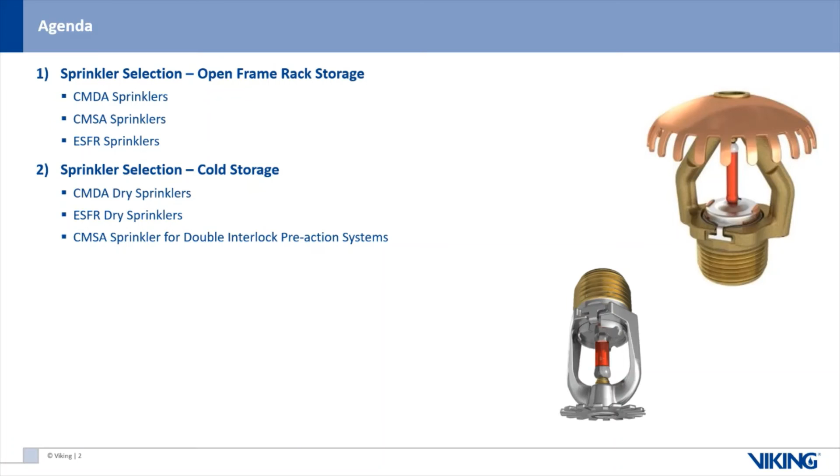And then next we'll look at sprinkler selection when it comes to cold storage applications. So anytime we have a non-heated area, cooler or freezer, Viking offers all different sprinklers, CMDA, ESFR, as well as CMSA sprinklers for a full line of cold storage protection as well.

As you exceed that density and get your higher pressures, what happens when the water strikes that deflector is the droplets will start to get smaller and smaller. And the higher pressure you go to get a higher density out of these small K factors, if you're trying to protect one of these high challenge, rapidly developing fires, these small water droplets might not be able to penetrate the fire plume, and they'll just be pushed away and not be able to control the fire. So that's why we see this limitation in density here on these smaller K factor sprinklers.

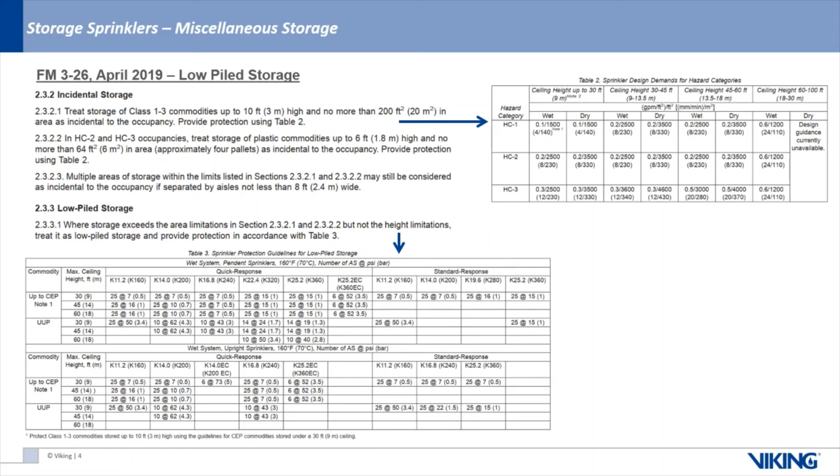Once we start to get a little bit higher in storage, get out of that miscellaneous storage or that low piled storage, now we can start looking at some of the larger K factor control mode density area sprinklers. A good rule of thumb when using these types of sprinklers, if you want ceiling only protection and want to stay away from in-rack sprinklers, your cap is usually right around 25-foot storage. So when you look at that, you can see some scenarios where you might be able to go higher, some where you might not be able to go as high as you get into the higher commodity classifications. But it's a good rule of thumb to keep in mind for these control mode density area sprinklers.

So for this example, we have the VK530, which is 11.2 K factor, and then the VK580, which is a 16.8 K factor.

Currently, what they'll use is, as you can see on the right, your ceiling density area curves. One thing coming up in the 2022 edition of NFPA 13 is single point density. It's looking to go that way, almost been passed through, where you don't have the curves anymore. For all these storage applications, you're going to have a single density, kind of like what's shown in our tables here for the 530 and 580. You'll be right there with, say, a 0.5 density or 0.7 density. Instead of using the curve to determine your remote area and density, it's going to be supplied to you right in a single point.

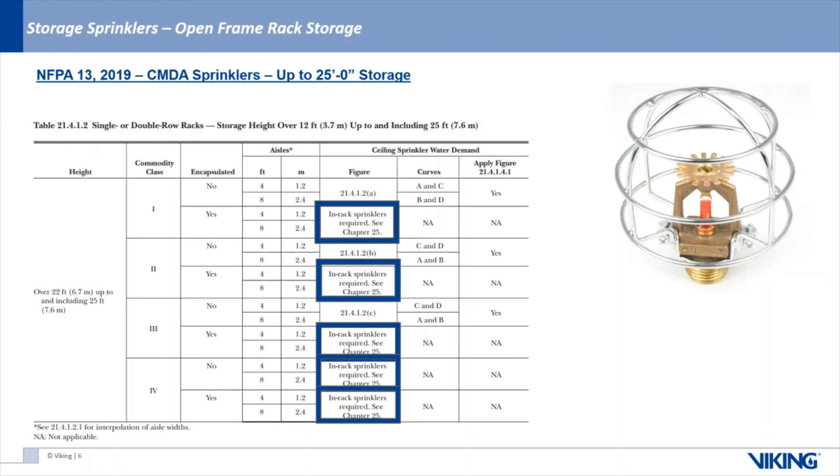When we look at the open frame rack storage, that's why we have our flue spaces. One, so the fire can travel up and activate the sprinklers when we have our ceiling only protection, but also with your longitudinal and transverse flue spaces, those are common places where you can see your in-rack sprinklers being required to be located at multiple levels based upon what's being protected.

Another CMSA storage sprinkler that we offer would be the VK592. This is a 19.6 K factor pendant. And copied in the table in front of you, you can see, once again, it's a number of sprinkler design, 15 in this case, with a specific operating pressure. The information for the sprinkler can be found either in NFPA or on the technical data sheet.

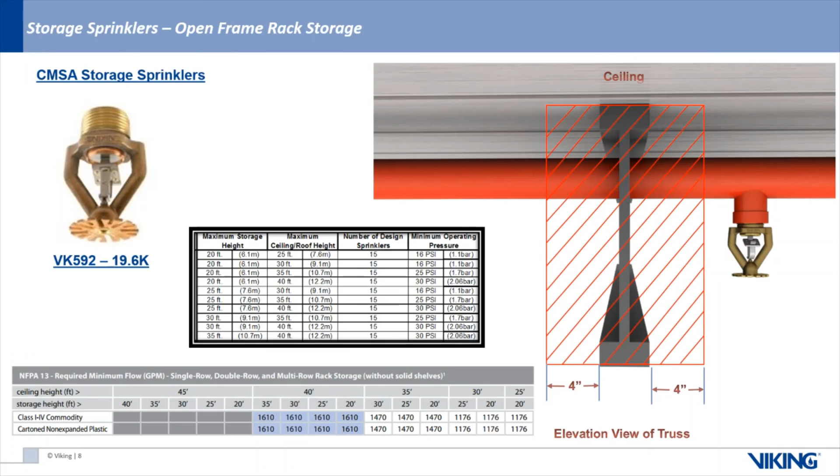As you can see in the table at the bottom, it does start to become restricted at certain points. Anytime you exceed 40 feet ceiling height, it would not be an option. Its sweet spot for hydraulic advantage is right around 30 to 35 feet, so it can be used up to 40 feet if you need it for those obstruction rules. But most of the time, if you have a 40-foot situation, you're going to be looking at one of the ESFRs that we offer.

Talking about the ESFR sprinklers, the early suppression fast response, these are similar to the CMSA sprinklers, as it's always going to be a number of sprinklers designed over a certain pressure. We start out with our lower K factor ESFR sprinklers for the lower ceiling heights. In this case, we're looking at up to 30-foot storage to start out with our smaller K factors.

You have your VK500, which is a 14.0 K factor, and your VK503, which is a 16.8 K factor. Both of them you can see in the tables with 35-foot ceiling height and 30-foot storage require the same amount of flow for the most part, 1455 for the VK500 and 1454 for the VK503. So really what that comes down to as to which one you're going to select would be based upon your water supply and whatever your pressure available is.

If you need to reduce the pressure in order to meet your calculations for the system, then you'd probably be looking at the VK503 in that instance. If you have plenty of pressure and it's not a concern, you might opt for the VK500 in that situation.

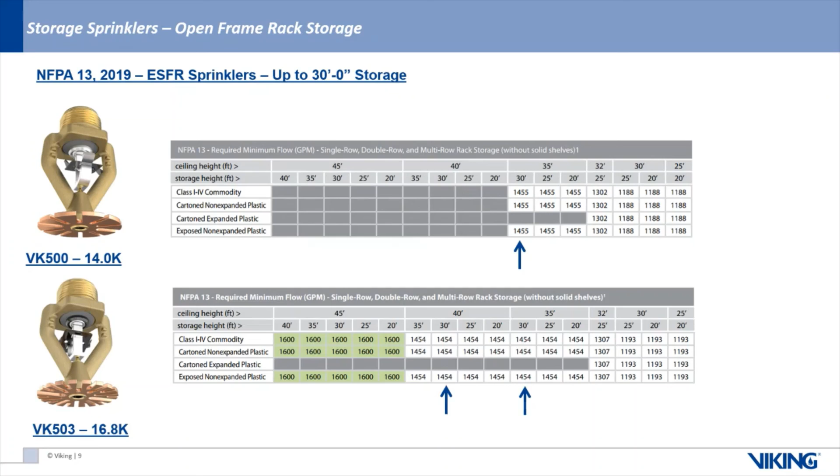You'll also see with the VK503 that it allows up to a 40-foot ceiling height with 30-foot storage, with the same flow that you saw for it with the 35-foot ceiling height with 30-foot storage. So that's about the sweet spot for these two K factor sprinklers, the 14K and the 16.8K. But we can also see with the 16.8K up to 35-foot storage using the 40-foot ceiling height, so now we can even increase the storage height a little bit more and still remain at that same flow up to 35-foot storage with a 40-foot ceiling height using the 16.8 K factor.

As we start to get higher, now we're going to get into our larger K factor sprinklers. In this case, we're looking at storage up to 40 feet. Now we're looking at the VK506, which is a 22.4 K factor, and the VK510, which is a 25.2 K factor, and you'll notice on the tables, I point out that they both require 40 PSI. So if you have a 45-foot ceiling height and 40-foot storage, you can see that the VK510, the 25K, requires 1,913 GPM, whereas the 22.4 K factor only requires 1,701 GPM.

That's because it's a smaller K factor and they both require the same pressure. So in most instances, when you have this type of scenario with a 45-foot ceiling and 40-foot storage height, you're most likely going to be looking towards the 22.4 K factor because it requires less flow.

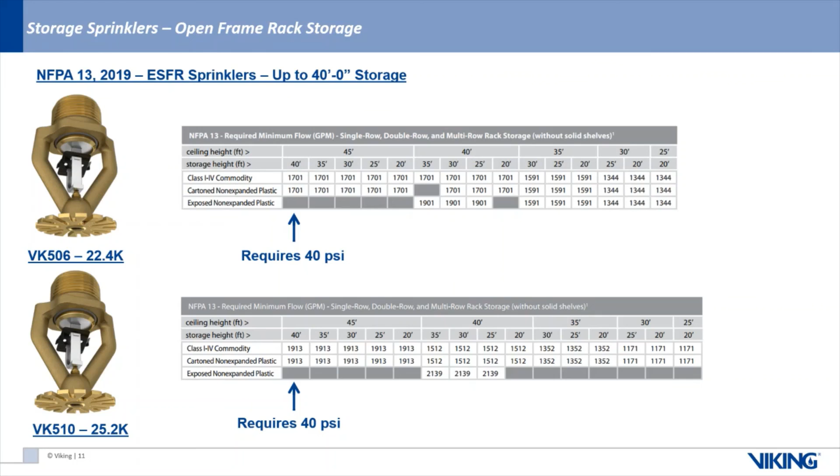Now, one of the things about the 514 is that it's an FM approved sprinkler. However, you can still use it as per NFPA 13 based upon the FM approval criteria, based upon this section where it states that nothing in the standard is intended to prevent the use of systems, methods, or devices of equivalent or superior quality, strength, fire resistance, effectiveness, durability, and safety over those prescribed by the standard. In this case, the VK514 would meet those requirements.

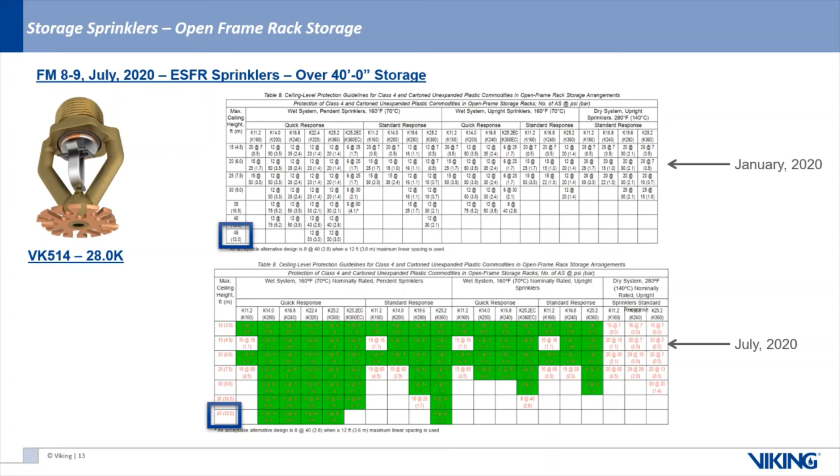If you want to talk about that more, I'd be happy to discuss the Factory Mutual changes with you, but we just don't have time to cover all that right now at this point in time.

So when I was talking about table 17B, now Factory Mutual kicks you up into table 17B, which is going to be for your ceiling height of 50 feet or 55 feet. But now anytime you exceed 40, you're automatically going up to this 50-foot maximum ceiling height. And this is where the VK514 works out very nicely. Because if you look at the 28K factor that I highlighted there on table 17B, you can see the design is 10 sprinklers at 40 PSI.

However, there's an asterisk next to the 28. If we go down to the footnote, it says the design of 10 automatic sprinklers at 40 PSI can be reduced to 9 automatic sprinklers at 40 PSI when the water supply can also provide a minimum pressure of 80 PSI for the most remote 4 sprinklers, 2 sprinklers on 2 lines flowing. If you performed hydraulic calculations for storage applications, you can pretty much see that anytime you're able to meet that 80 PSI with 4 sprinklers flowing, you're almost always going to be able to meet that and be able to reduce down to the 9 sprinkler design area.

So now we can do a 9 sprinkler at 40 PSI, giving us a flow of 1,593 GPM. Once again, this applies to all of the storage heights over 40 feet because it kicks you up into this table now as per July of 2020.

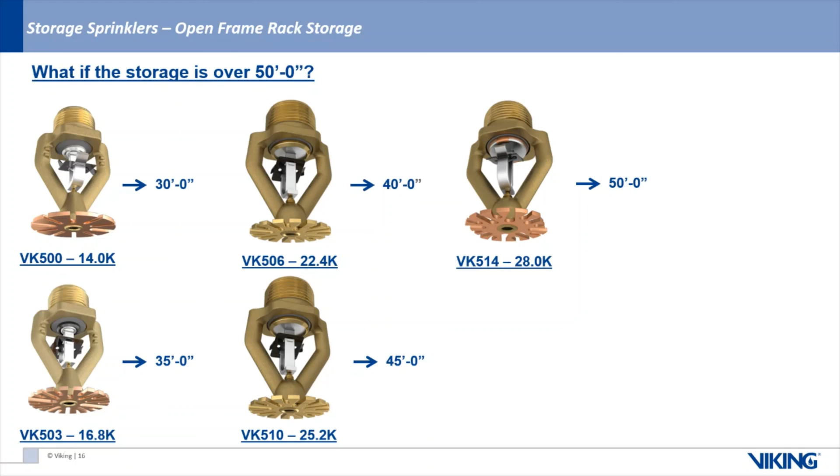But what happens if our storage is over 50 feet? Do we still have an option for ceiling only protection? The answer is no, not at this time. If your storage is over 50 feet, you don't have an option for ceiling only protection.

However, Factory Mutual did some research in a test program from 2011 to 2015, and it's been in Factory Mutual 8-9 for quite some time now, because we're seeing a lot of taller warehouses going 80 feet, 100 feet in certain situations. So we have to have a way to be able to protect them properly. So Factory Mutual did research and came out with that we can use ESFR sprinklers as in-rack sprinklers now.

And the nice thing about it is you don't have to balance the ceiling sprinklers with the rack sprinklers. They're independent designs. So for example, if we had an 80-foot building and let's say we were using the 22K factor ESFR, well, we design it based upon a 40-foot ceiling height up at the ceiling, and then 40 feet lower, we would have one row of in-rack ESFR sprinklers of the same K factor of the 22K to protect the next 40 feet down to the floor.

So instead of an 80-foot building with the traditional in-rack sprinklers where you would have multiple levels of in-racks all throughout the racks trying to protect that with the in-rack sprinklers, now you have the option to have one level at the ceiling and one level halfway down to protect below. It's the same design that you would use for a standard ESFR design.

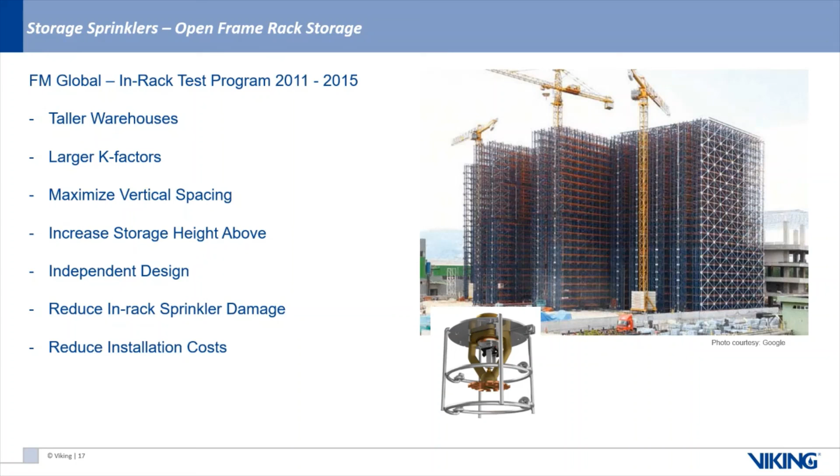So your typical spacing is 30 to 40 feet. It requires 14.0 K factor and larger, which is no longer a concern because no ESFRs are made that are smaller than 14K anymore. And once again, you have no balancing of the ceiling and the in-rack sprinklers. Also in the 2019 edition of NFPA 13, this same criteria was added as well. So based upon FM 8-9 and the current edition of NFPA 13, ESFR in-racks are a possibility.

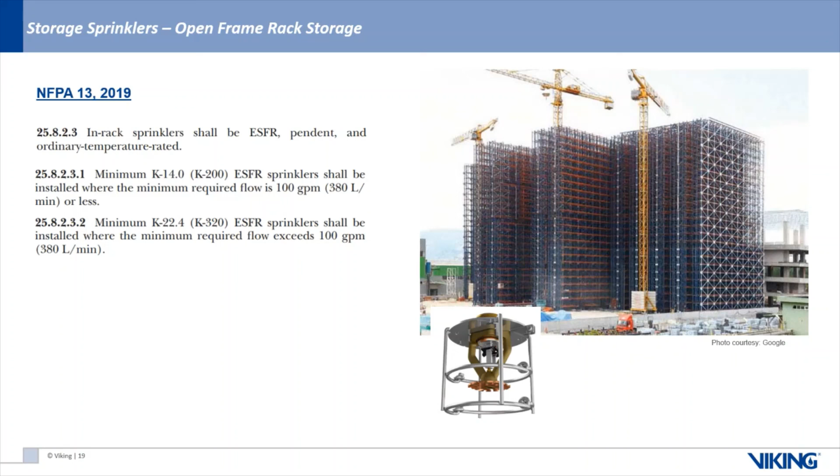Looking at our cold storage sprinklers, getting into that, we have the same options. I'm not going to go through the whole density thing here again, but we have our 5, 6, and 8K factor dry sprinklers that can be used up to a specific density. Now remember, for Factory Mutual, you can't use the 5, 6, or 8K for ceiling only protection for high pile storage, whether it's cold storage or a heated area.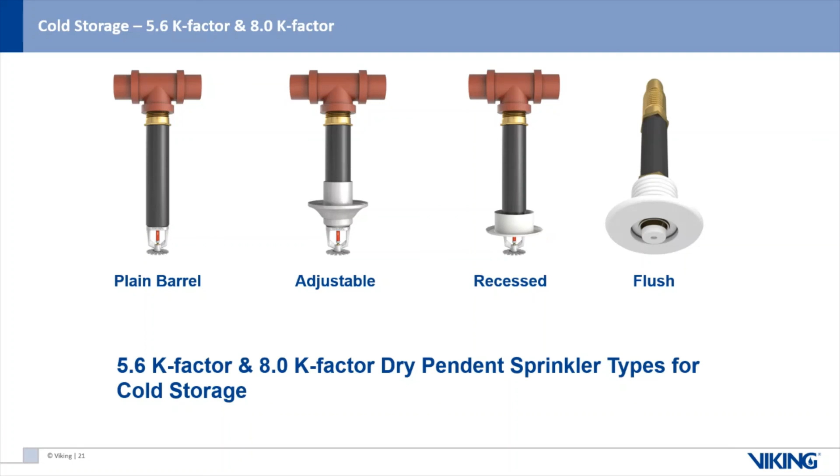So as you can see with the 5.6 and the 8Ks, there's quite a few different options for your sprinkler selection. Once you start to get a little bit higher in storage, and now this is where Factory Mutual comes in as well, because FM doesn't allow less than an 11.2 K factor. So once we get to the higher box-in-a-box applications, we can start looking at the 11.2 K dry sprinklers.

They're quick response and standard response. And as I was talking about before, in a lot of situations, these will allow for up to 25-foot storage height without requiring in-racks. So when you have a box in a box, which means that you have a heated area above it where you can run a wet system and then just connect with your dry sprinklers to drop down below, you have that possibility with the 11.2 K factor dry sprinklers.

And this table here just kind of shows you there's a lot of different commodities and a lot of different ceiling heights with a lot of different storage arrangements, where the 11.2 K factor ELO dry pendant actually requires the least overall water demand at those ceiling heights. So there's a lot of applications where that could be applied.

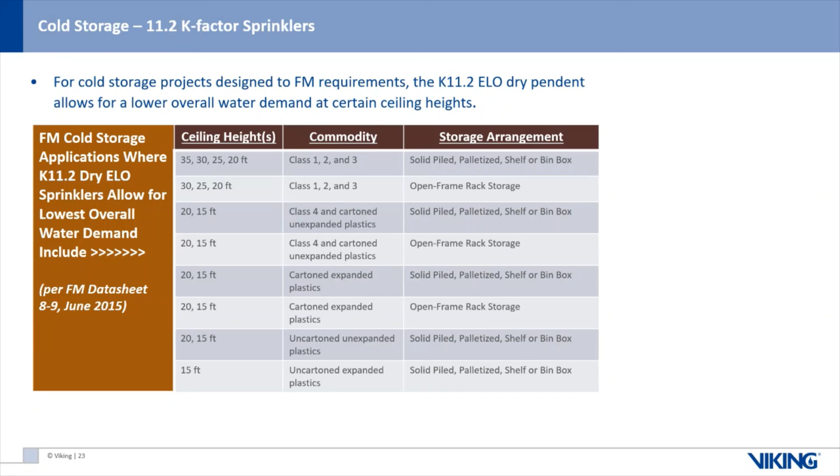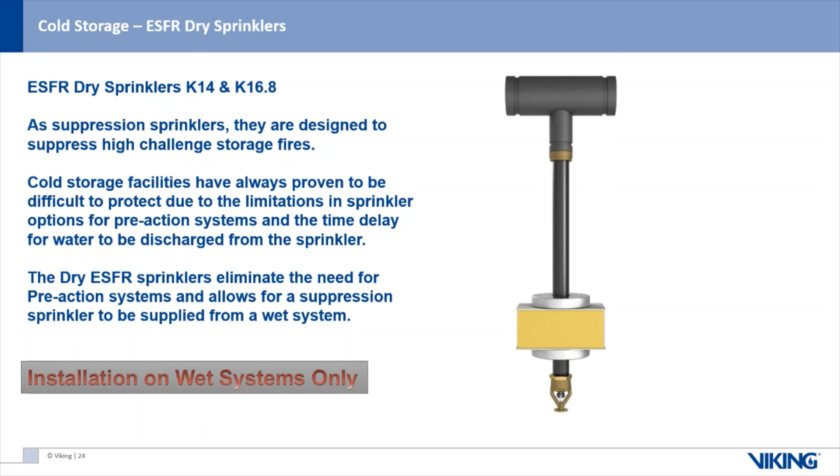However, once we get a little bit higher now in our cold storage applications, now we're looking at our ESFR dry sprinklers. So 14 and our 17K ESFR dries are available as dry sprinklers. Still, since they're ESFRs, they're wet systems only, but they allow for the same design criteria that you would have with a standard 14 or 17K ESFR sprinkler.

And your calculation would be the exact same way, your 4 sprinklers on the most remote 3 branch lines, as per NFPA 13, and in most situations for Factory Mutual.

So when we look at a system material comparison with the ESFR dries, if you had a double interlock pre-action system, this is what you're looking at. There's a lot going on here, a lot of maintenance requirements you have to worry about with your air supply, detection, low point drains, and you've got your crawl space piping, your in-racks, and your ceiling protection inside the freezer.

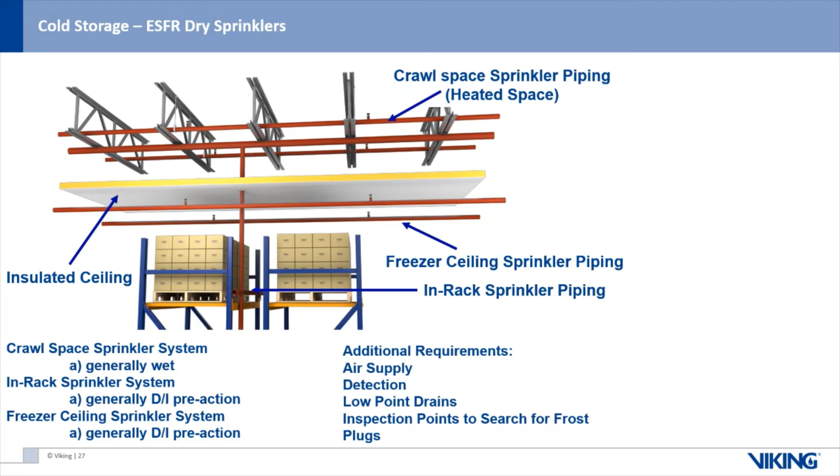Well, just by switching to the ESFR dry with that heated crawl space above, you can see a lot of that being reduced. We don't have any of those additional requirements because we don't have a double interlock pre-action system. We don't have the in-rack piping, and we don't have any piping run throughout the inside of the cooler, because now we're just connecting in the heated area above and dropping down with our ESFR dries to protect the cooler freezer application.

The last sprinkler we're going to look at is a CMSA upright sprinkler. This sprinkler can be used for double interlock pre-action systems. A system a lot of people have heard about is a Quell system, which allows for up to a class 3 commodity and a certain storage height to do ceiling-only protection using a system that has dry piping until the system activates.

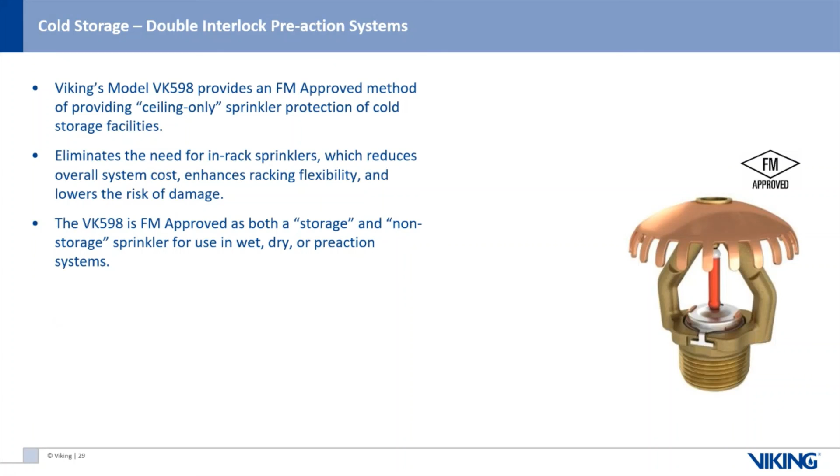Well, the VK598 allows for that as well. It allows for up to a 45-foot ceiling height with 40-foot storage, using a double interlock pre-action system up to a class 3 commodity. We can see here that it can be used in certain situations where it's not a cold storage application. However, where we see it most commonly used, and where the sweet spot really is for the sprinkler, is in your freezer and cooler applications up to a class 3 commodity, to help you avoid requiring in-racks.

So when I was talking about the dry sprinklers earlier, I was talking about a box-in-a-box application. Well, the VK598 comes in now where you don't have that box-in-a-box, and your cooler freezer walls go all the way up to the deck. So now you need to install a sprinkler at the ceiling inside the area that's being protected.

So we can see here with the VK598, all the information is going to be found right on the data sheet, based upon the table that we're looking at. You'll see that it requires a water delivery time. In order to get that ceiling-only protection so high with a double interlock pre-action system, you have to be able to prove that you can get the water there in a certain specific amount of time. So in certain cases, you might have a 20-second water delivery time, or a 25-second, or a 40-second.

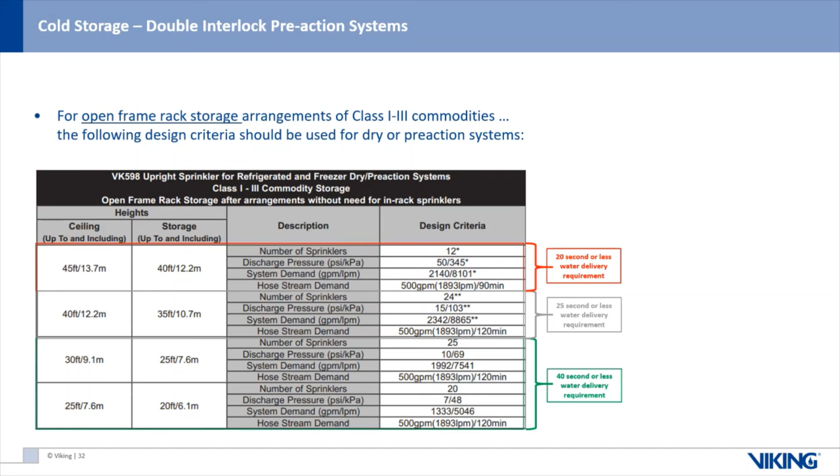Now, one of the things we offer as support for the VK598 sprinkler is we'll run these water delivery calculations for you in our technical service department, to help you see if you'd be able to meet these required water delivery times when using the VK598 sprinkler. So all the information is going to be on the data sheet for the applicable sprinkler.